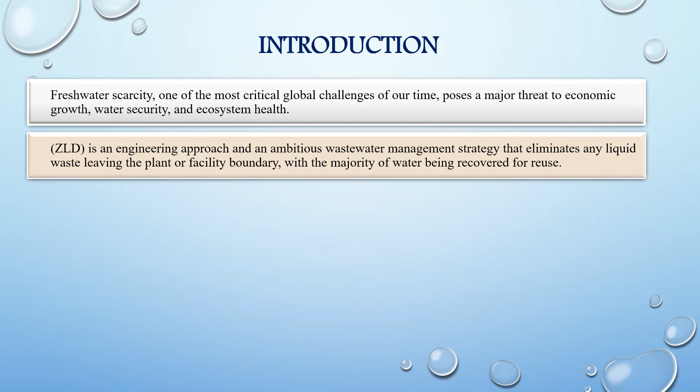Zero liquid discharge is an engineering approach and an ambitious wastewater management strategy that eliminates any liquid waste leaving the plant or facility boundary, with the majority of water being recovered for reuse. Achieving zero liquid discharge, however, is characterized by intensive use of energy and high cost. As a result, zero liquid discharge has long been considered not viable and has been applied only in limited cases.

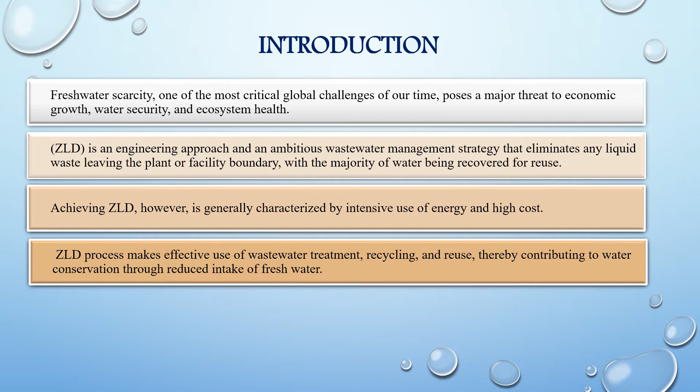Zero liquid discharge processes make effective use of wastewater treatment, recycling, and reuse, thereby contributing to water conservation through reduced intake of fresh water. Worldwide construction of zero liquid discharge plants represents an average of $200 million US.

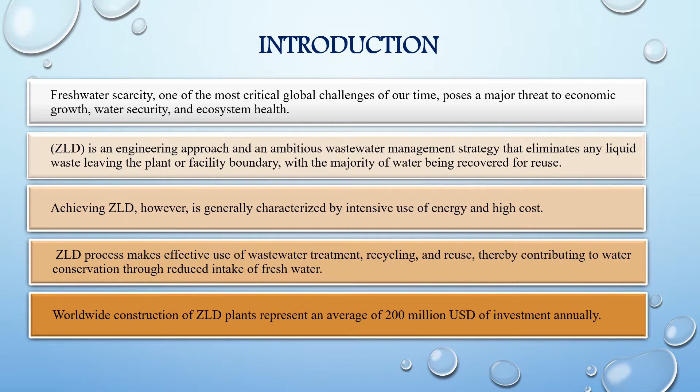Moving on to the drivers, benefits, and challenges of zero liquid discharge, the main drivers of zero liquid discharge implementation are water scarcity, water economics, and environmental regulations. Water scarcity intensifies globally. The capability of zero liquid discharge to recover water to the largest extent further enhances its prospects.

While the main challenges are the need of integration of suitable technologies to achieve reduce, recycle, recovery, and reuse. Furthermore, capital cost and operating costs of zero liquid discharge, including energy costs and chemical costs associated with the evaporation and treatment processes, are considered way higher than any other disposal techniques. Finally, effluent composition and characteristics and material compatibility are also considered some of the zero liquid discharge challenges.

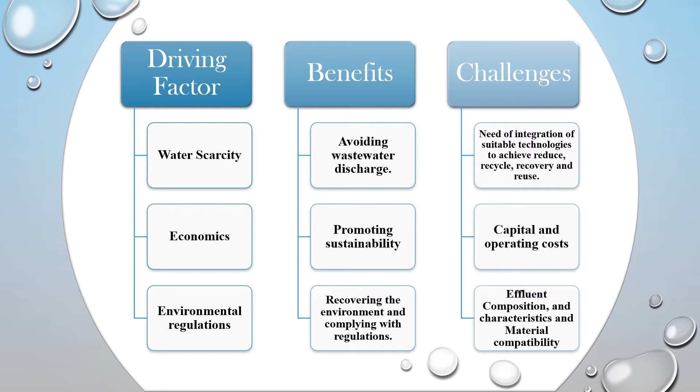Zero liquid discharge thermal system. In this figure, we can see that the major elements involved in this system include wastewater pre-treatment, treatment in a brine concentrator and brine crystallizer, followed by evaporation and solids recovery.

During pre-treatment, wastewater undergoes various processes such as filtration, pH adjustment, deaeration, and anti-scaling to minimize the scaling potential of water. Next, this water is sequentially concentrated using brine concentrator followed by brine crystallizer. This produces distillates that are recycled and reused as clean water, while solids are either recovered as valuable byproducts or sent to evaporation ponds for disposal after further processing.

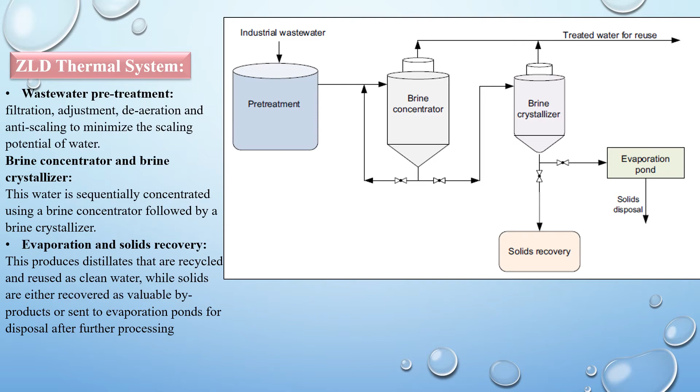Reverse osmosis and emerging membrane-based zero liquid discharge systems. Limitations: brine crystallizers or evaporation ponds are still indispensable for zero liquid discharge processes. Therefore, the focus for zero liquid discharge technology has been on reducing the volume of concentrated brine entering the brine crystallizer or evaporation ponds. Reverse osmosis, a well-established pressure-driven desalination technology with excellent energy efficiency compared to thermal desalination, has been incorporated into zero liquid discharge operation to lower energy consumption.

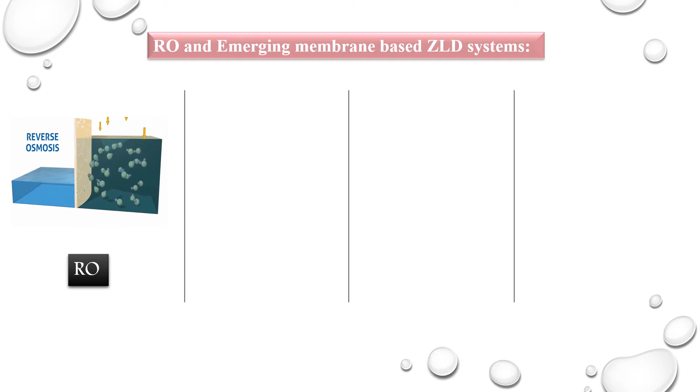Unlike thermal processes, reverse osmosis does not require product water to undergo phase transition to achieve separation, thereby eliminating irreversible losses associated with evaporation and condensation in thermal processes. Three membrane-based processes, electrodialysis, membrane distillation, and forward osmosis, emerge as alternative zero liquid discharge technologies to brine concentrators to further concentrate the wastewater after the reverse osmosis stage. The produced brine from these processes serves as a feed to the crystallizer or evaporation pond.

Electrodialysis applies an electric potential as the driving force to remove dissolved ions through ion exchange membranes. Membrane distillation is a thermal membrane-based desalination process in which a partial vapor pressure difference drives water vapor across a hydrophobic microporous membrane. Forward osmosis, unlike hydraulic pressure-driven reverse osmosis, utilizes an osmotic pressure difference to drive water permeation across a semi-permeable membrane. In forward osmosis, water flows from the feedwater to a concentrated draw solution with a higher osmotic pressure.

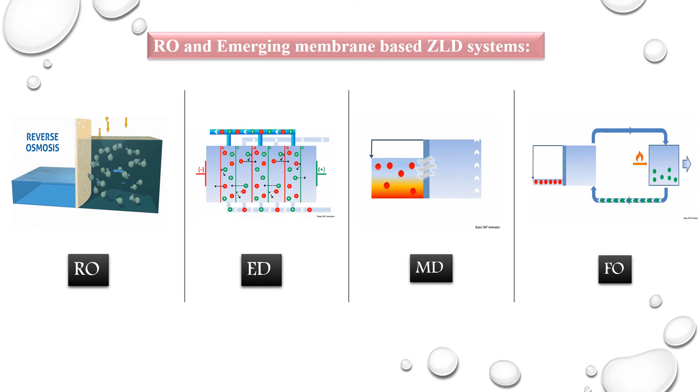The limitations for reverse osmosis are the limited salinity range and the high fouling tendency. For electrodialysis, the limitation is a high energy consumption for high quality water product. The limitations for forward osmosis are the low flux at high salinity and the limited use.

Also, the limitations for membrane distillation are low flux and recovery and the requirement for post-treatment. Finally, the limitations for the MVC process are high consumption of energy and high operating, maintenance and capital costs.

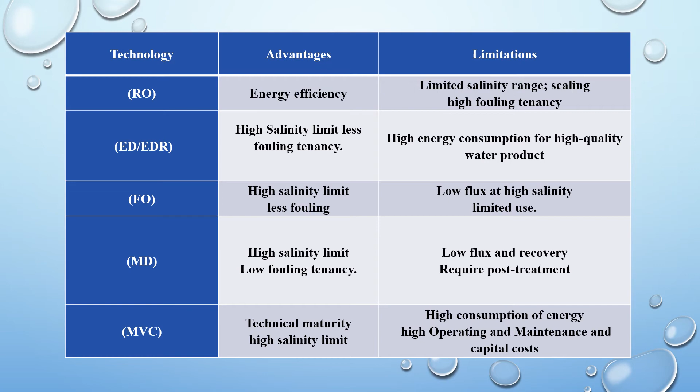The main environmental and operating characteristics of zero liquid discharge. Despite the main goal of zero liquid discharge to reduce water pollution and to improve water sustainability, application of zero liquid discharge also results in unintended environmental impacts. One risk stems from the produced solid waste.

For example, solid waste stored in evaporation ponds has raised concerns about odors, potential negative impact on wildlife, and risk of leakage. Similarly, solid waste disposed in landfills may result in leaching of chemicals into groundwater.

As discussed earlier, zero liquid discharge consumes large amounts of energy, leading to significant emission of greenhouse gases. Some pretreatment methods, such as acidification followed by degasification, release CO2 from the feedwater into the atmosphere. For example, the application of electrodialysis in concentrating reverse osmosis brine increases CO2 emissions via both energy consumption and decarbonation

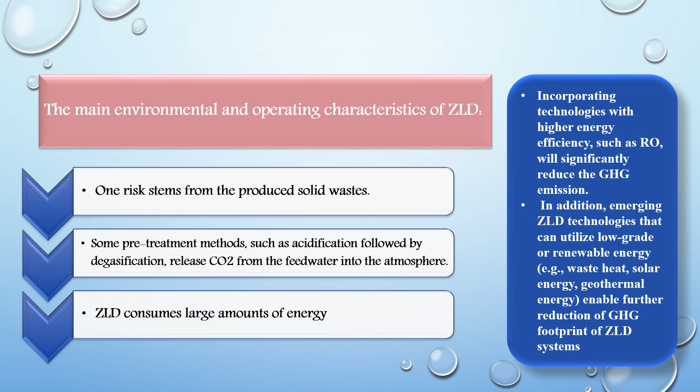of scaling control. Also, incorporating technologies with higher energy efficiency, such as reverse osmosis, will significantly reduce greenhouse gas emission. In addition, emerging zero liquid discharge technologies that can utilize low-grade or renewable energy, such as waste heat, solar energy, and geothermal energy, enable further reduction of the greenhouse gas footprint of zero liquid discharge systems.

This slide gives an overview of the factors affecting desalination and future research strategies and directions to meet the challenges facing the worldwide application of this process. These 5 areas affect the costs of desalination, and research and development in these areas can be used as cost-cutting measures. There has been an extensive amount of research and development work in 2 areas.

The 3 areas that seriously require research and development work are feedwater and system characterization, process optimization, and concentrate management. The advancement in feed and system characterization is a prerequisite for the advancement in the other 2 areas and would automatically benefit the other 2 areas.

Efforts should be directed to establishing proper techniques for feedwater characterization, developing indices for colloidal fouling and for inorganic fouling, and incorporating the interactive and hydrodynamic effects that are usually ignored. Advances in computational techniques and coupling the theoretical principles with advanced experimental analysis certainly would provide that opportunity.

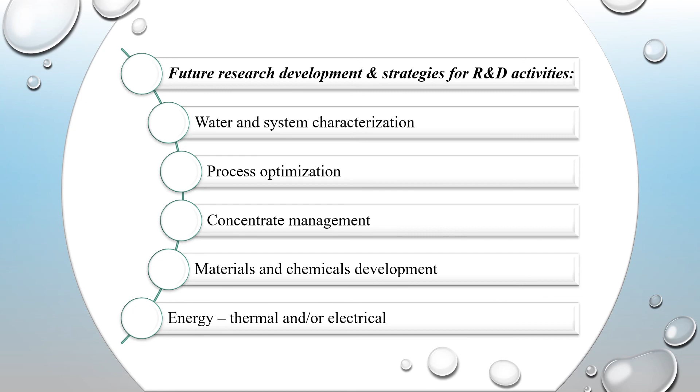As mentioned before, once the proper feed characterization method is developed, it would facilitate process optimization for operation as well as for product quality and for concentrate management.